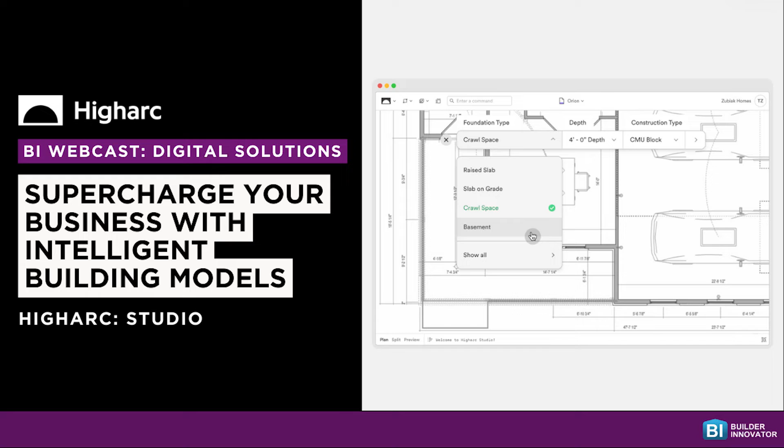Let's take a move to the studio element of Higharc. This is your intelligent building modeling tool.

I'd love to see how this is in action at Buffington Homes.

When we first onboarded with Higharc, we kind of just grabbed a group of people in our office and said, do you want to learn studio? So there was like 6 or 7 of us learning, and we had someone working for us. He was a younger guy, 24, just working in the field, sweeping out houses. We knew he was really smart and good with computers, so we said, hey, why don't you come in? Are you interested in learning this?

And he is now our full-time drafter. So he went from working in the field and sweeping houses, and if you ask him his favorite thing, he just says being inside is good enough. But he is our full-time studio drafter.

I wanted to highlight that because I don't have any CAD experience either, but I can draw on Higharc. It's a tool that anybody can learn, and I really love that aspect of bringing the learning curve down for our company. Our systems before had a really steep learning curve, which made it difficult for us to pivot or onboard new people or make changes.

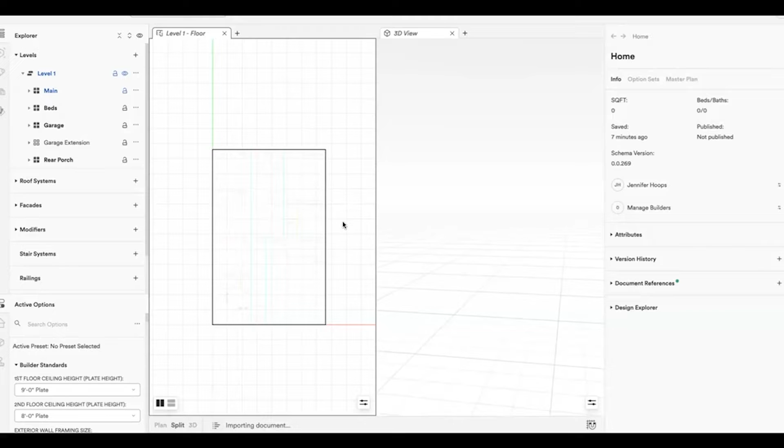So this is our favorite fun little demonstration that we do for Studio. What you're looking at is Higharc Studio, where homes are created and maintained. So what I'm going to do is create a house real quick.

I'm going to use two commands for the entire demonstration. I just used R for room or rectangle, and you can see a house-like object on the right. I'm going to take the roof off so you guys can see what I'm doing here.

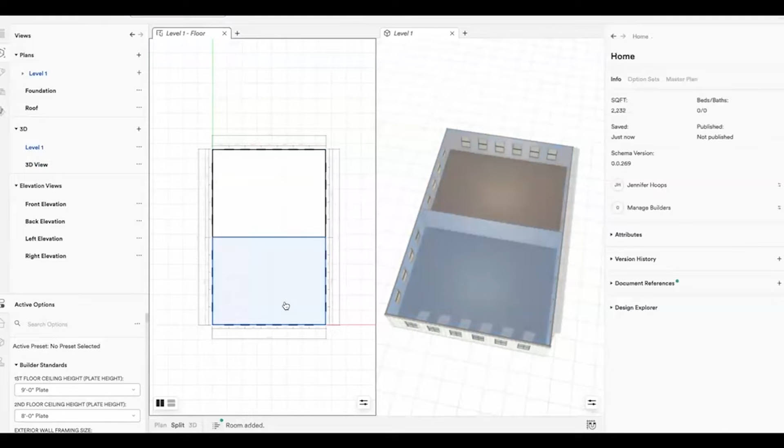Now as I start to break up these spaces, my second command is K for knife split. You're going to see things changing in the model, and what's changing reflects what's in the central data model. We don't have windows in walls, we don't have things happening that aren't buildable. The more information we give Higharc, the better the execution will be.

So think of this essentially as me creating a bubble diagram of where I want the spaces to be within the home. There's nothing magic about the lines on my screen underneath, that's just to help me get approximate sizes.

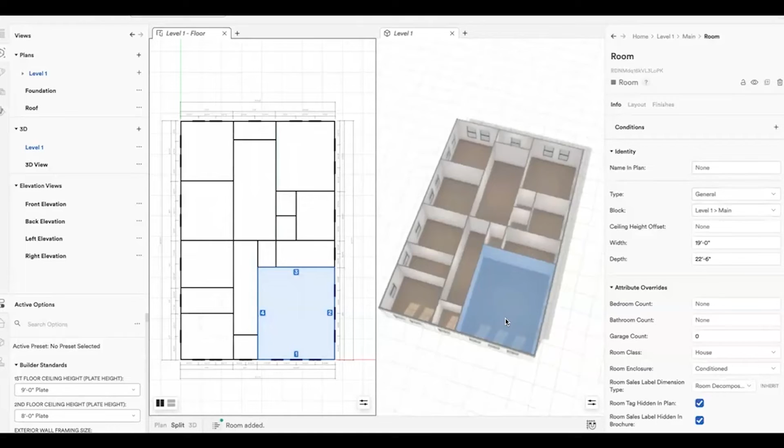But you'll really start to see it here when I take this room at the bottom and turn it into a garage. In that instant, the details have been applied, the foundation has been updated, Type X drywall has been added, all of the things I need to have happen with this home have been executed.

I'm going to go through and change a few of these. I just changed that to a front porch. Now watch what happens when I change this to an entry. Immediately we get a front door and some electrical. The reason that happened is that we're not only managing individual spaces, but also the relationships between those spaces.

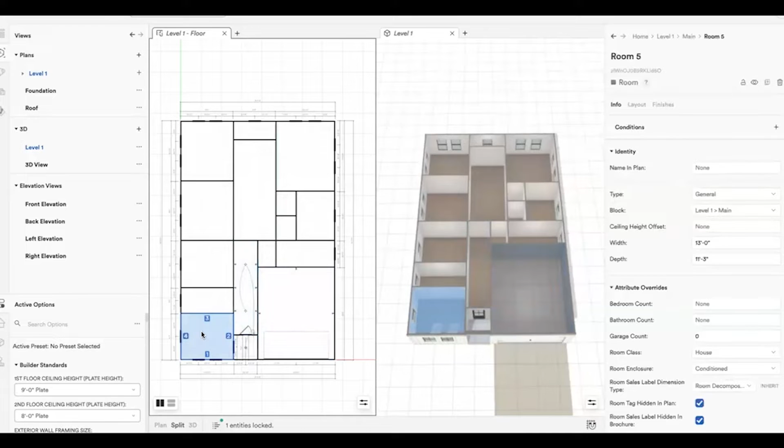So I'm going to turn this one to a bedroom, and this one into a bedroom as well. When I change this one into a bathroom, you're going to see it change too. Then I'll change this to a hallway, and a whole bunch of stuff will happen real quick here. All right, so now we've got fixtures, electrical, and so on.

This also allows you to centralize things you want to offer across the board. So what do I want my base house kitchen to be? What do I want my walk-up, as I call it, to be? Say I want to sell another type of kitchen with different appliances, I can define that one time and it will be available for me across the board.

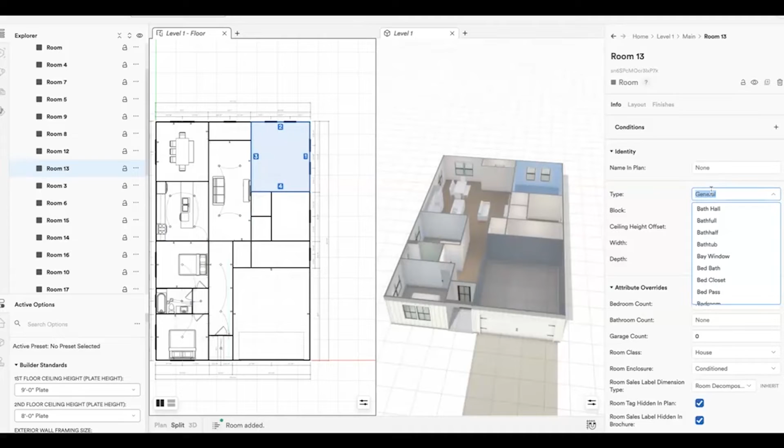Yeah, so you've built these structural, electrical, and mechanical standards for your rooms based on the level of quality you want, your preferred vendors, etc. And then this tool is auto-populating that stuff as you design rooms.

Keep in mind too that since Higharc is created for home building, it works right out of the box. So you don't have to create all of these rules. Really what you have to do is indicate what your choices are, what your preferences are.

In this specific example, I'm changing something that happened automatically that I wasn't quite happy with. So I had two doors from this rear porch into the house. Let me do that one more time. That's because I set it up so the rear porch could enter the living room or the dining room. In this instance, I don't want two doors.

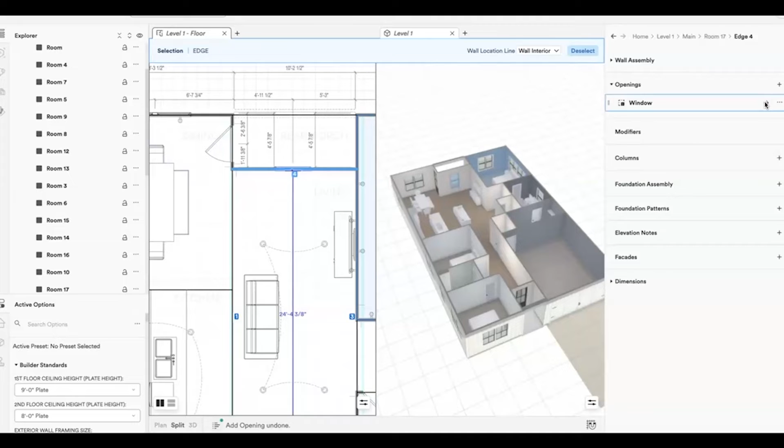So I very quickly can come in here, select the wall I want to change, and simply change it from a door to a window. Then I dive in a little further and I can change it to a bigger window if I want.

So who does all the work of these construction standards? Do you guys at Higharc have a templated set of standards that then can be tweaked and modified? It's not being built from scratch by each builder.

Yeah, they send us basically all of the rules, kind of like the Higharc base settings that are in the program, and then we just tweak them. Now, they don't work for every community—you're going to have different things in different communities or for different plans—but it'll get you a lot farther on that first try when you start drawing your next plan.

So what's the investment for Higharc in having that sort of design and engineering expertise?

What took us the time wasn't necessarily getting the settings in place, but making sure our system was flexible enough to handle everybody's variables. We tried to streamline things like, what does the note say for the corner board? No one can agree, right? So we've made it very easy for you, one time, centrally, to say, I want my corner board note to say 4-inch trim, and that will be updated on every document she ever produces. So behind the scenes, what we've built isn't the settings or individual rules—we've built the platform that allows it to happen.

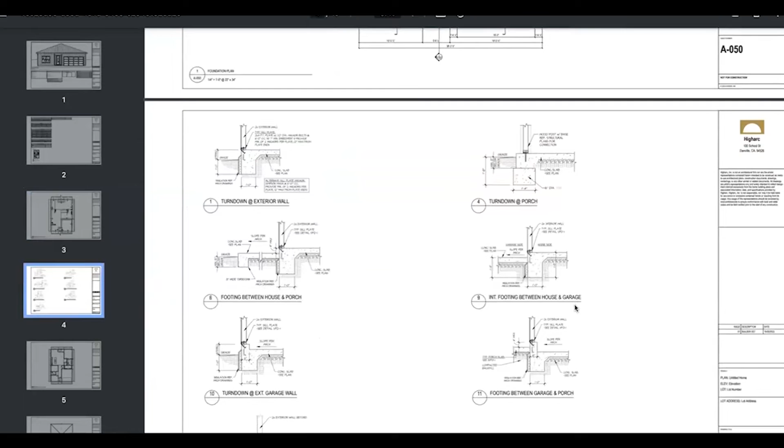So I want to point out some of that here. This is the house that I just made with you all. We have a lot of good information here that's approaching a permit-ready plan set. Of course you'd need to add to it, but I didn't draw these dimensions, you didn't see me do that at all, I didn't draw any of these notes, and I didn't draw the electrical plan, which I'm thankful for. What Higharc has done is generate this plan set from the information we have in place for this house.

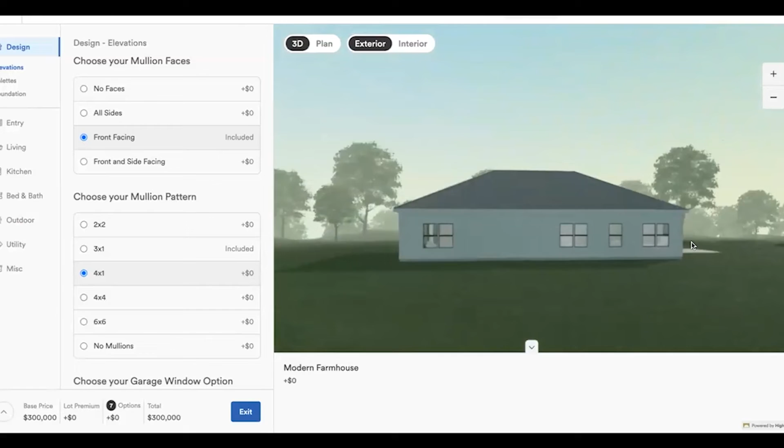Now we can also take a look just to close the loop—this is that same house in the showroom environment that Marissa showed you earlier. That's the layering I was talking about: you have your central data model, you create your plan, and at the same time you're creating your sales experience. Jennifer's going to show you guys the takeoff data it generates too.

Marissa, what kind of investment on Buffington's part in terms of the human resources component to get this stuff customized to your needs? Was it like an extra 30% of work for the personnel typically involved, or was it the same amount of work or even less?

I think for us, we kind of knew we had that tribal knowledge, so we just had to get all those people in the same room and work through the template that Higharc sent us. It only took us, I think, like an afternoon and lunch to work through it all, so it didn't take long. I talk to a lot of builders who are interested in Higharc, and they're always interested in how long that takes, but for us it wasn't a huge lift. You're not looking for perfection every single time, you're just looking to take that tribal knowledge and put it into one document.

And how do the folks that contributed the tribal knowledge feel about the working tool? Is it a thriller for them?

I always tell people this too—I think our team is kind of impressed by ourselves at this point, that we took our power back in a way. We were outsourcing all of this work when we can do it faster and better. We know what we want, so it's easier for us to just say, oh, move that, change this, do that. We do product development sometimes in real time in our meetings, and that's unheard of. So if we're close to getting a house done, we'll have our drafter come in and tweak things as we all sit there, and then we'll say, okay, yeah, that feels right, let's move forward with that.